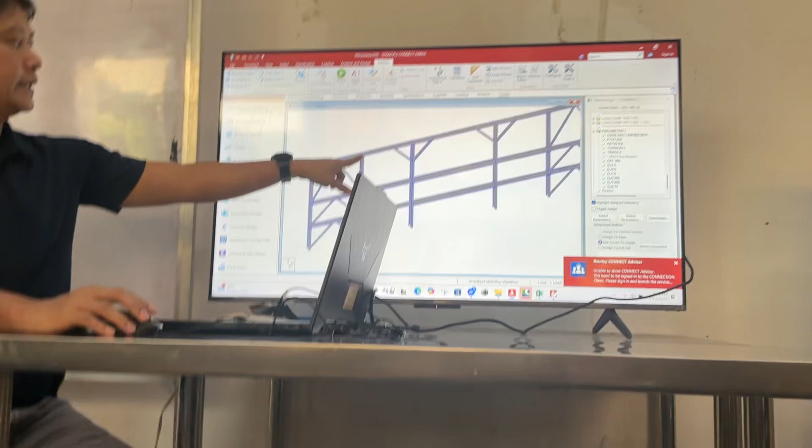This whole beam is being supported by this column. Either fixed supports or pin supports, basic setup. So this is one whole beam.

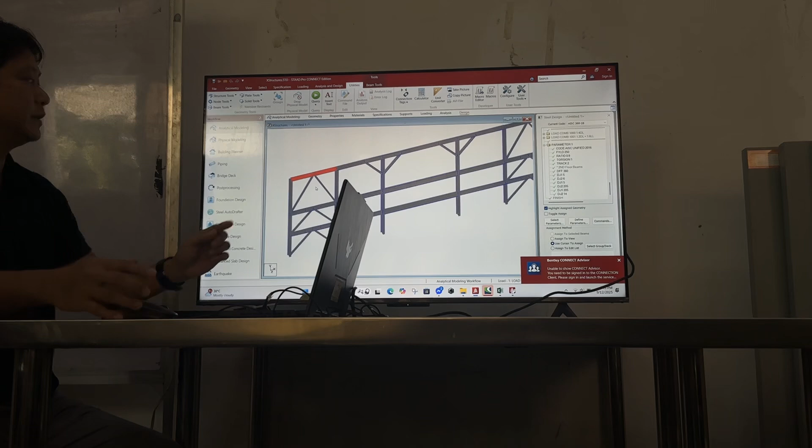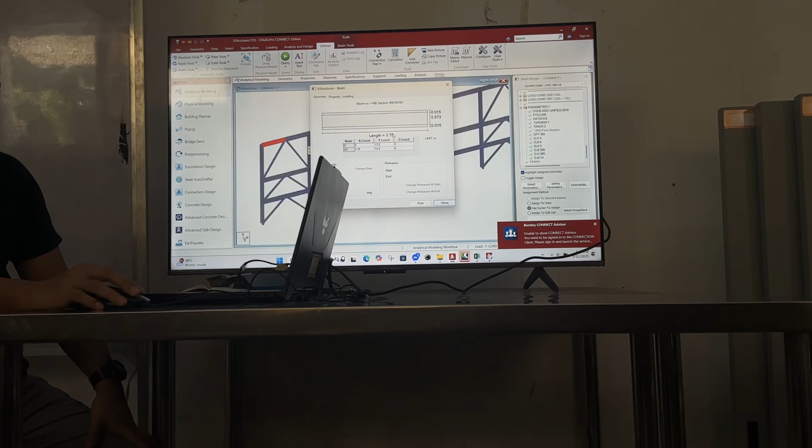The wind load is acting at the center, at the point where we're discussing. In this case, since it's a point load, it's in the middle. So the projected area of this beam is the depth of this beam. If you look at its depth, you can double click to get the area. 3.75 meters times, you add, you will come up with this number, 0.61 meter. That's your area, times its pressure. So you get a point load in kilonewtons.

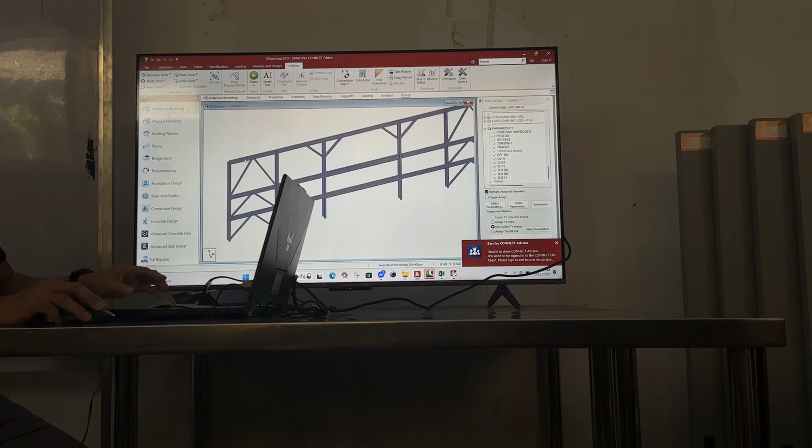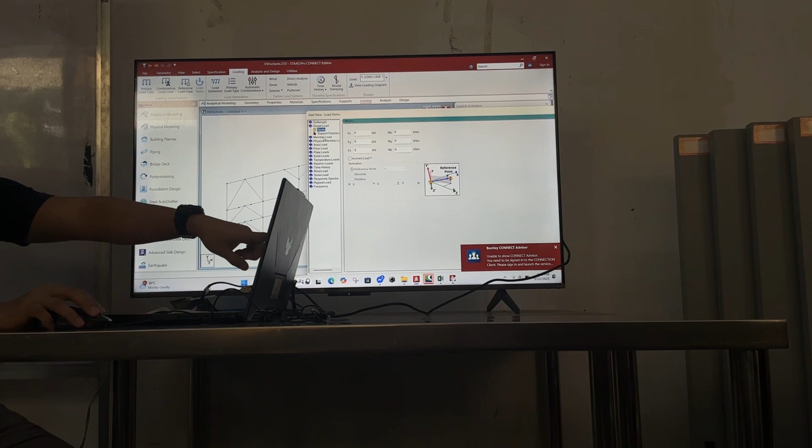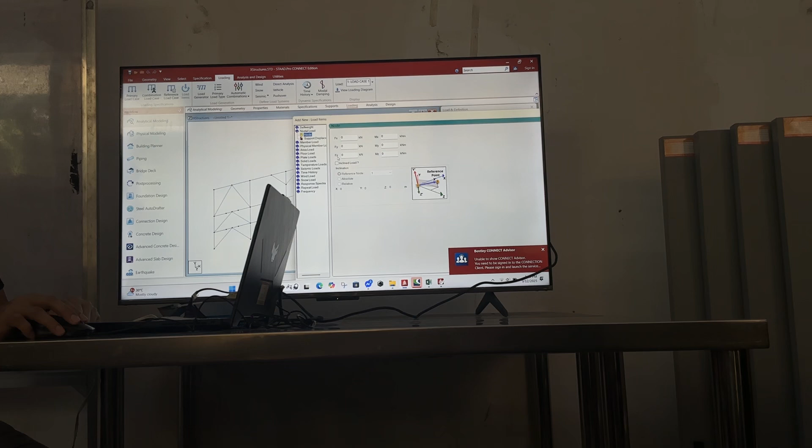Using this information and looking at the global axis, this is directed towards negative Z. So you go here, this is the unit, concentrated force, negative Z, so negative value.

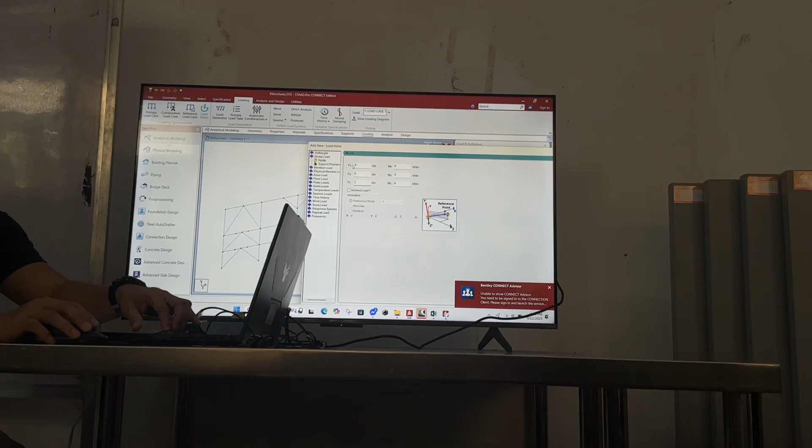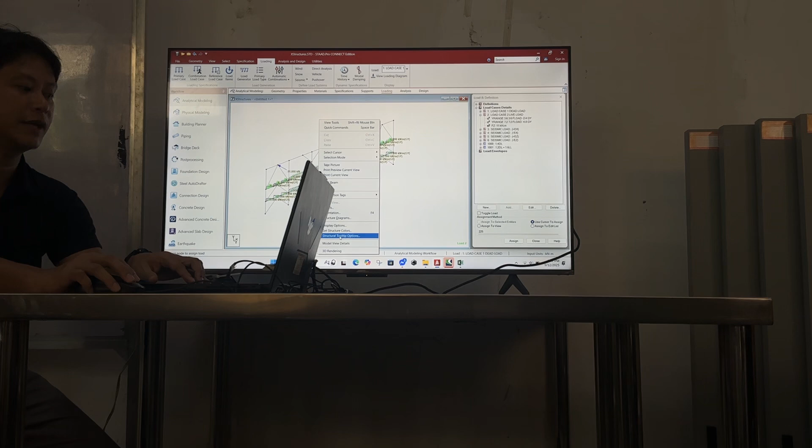What if about a load being applied to this brace, or to this member?

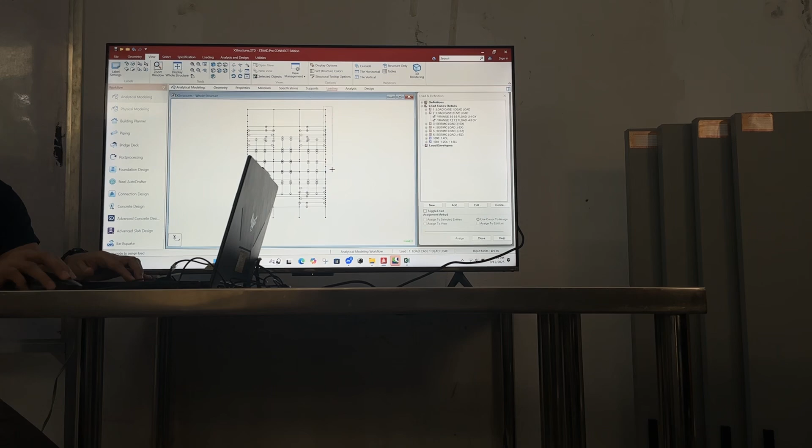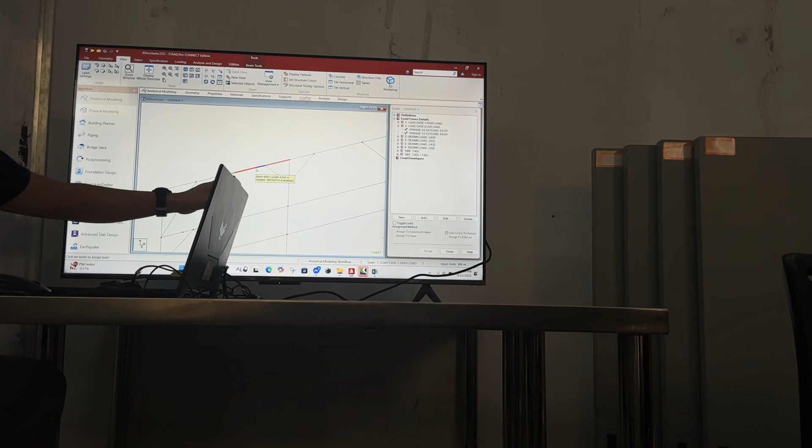So this one is 4.5 and this one is 3, they're not equal, right? So at the midpoint, that's where you place the force. Since the start of the beam is to the right, the 3.75 from this point, going to the right, will lie somewhere on this member.

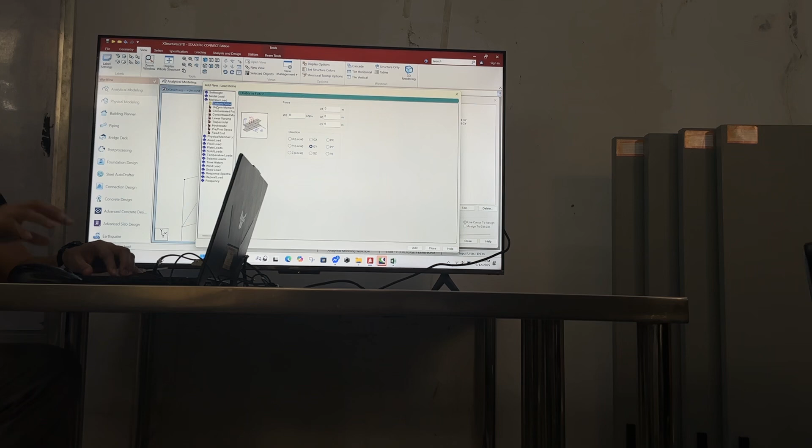Now for the wind load, you add the load, go to member load, concentrated force. Pick concentrated force, like this.

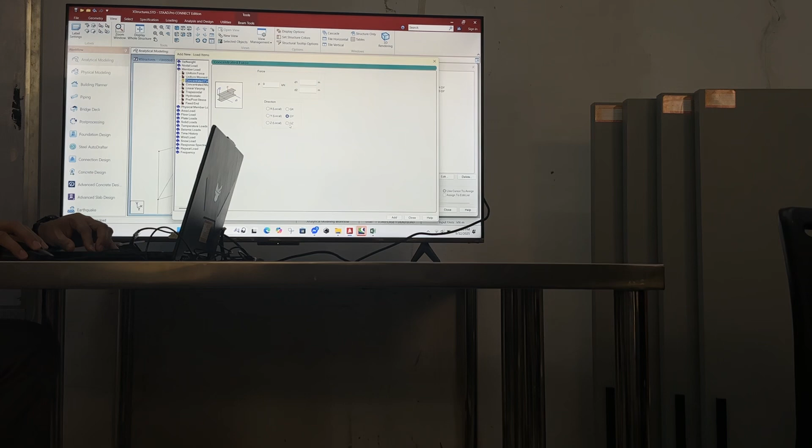Looking at the global axis, that is Z, along Z. So pick what you're using: Global Z. There's also Local, right? Global Z. Now the force is going to the negative direction, so you use negative. Negative 11.

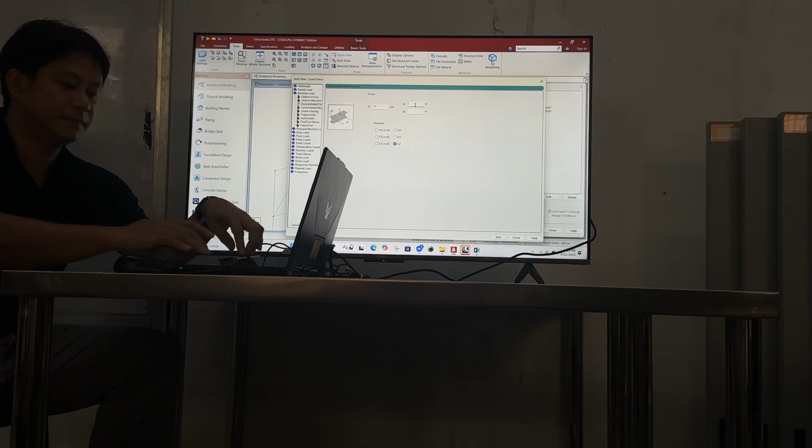Then your D1 is your distance along the beam, so that's 3.75, right? That one is from the center of the beam to the end of the wide flange, so it's 0. You can input 0, or you don't have to, the default stays the same. You can input 0 directly.

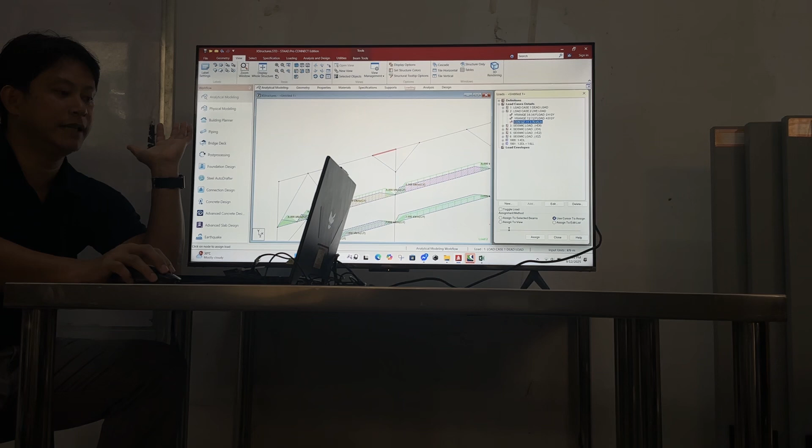Add, close, like that. Question mark, meaning it's not yet assigned. So you need to assign it. Click on that one.

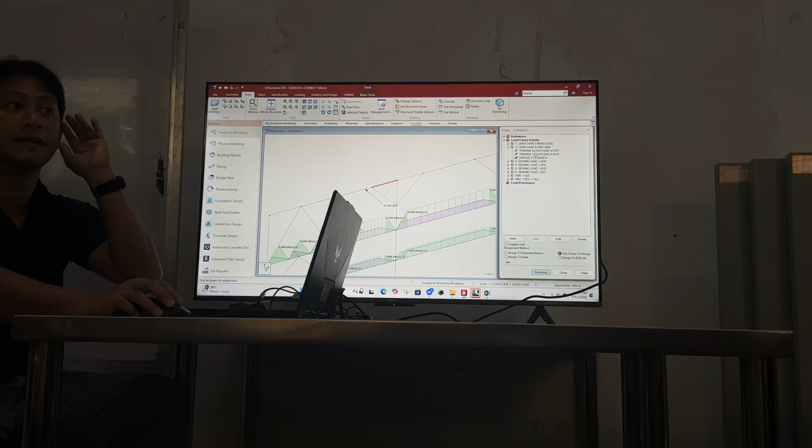So if you look at the syntax, on GZ, negative 11 force, located at 3.75 of the beam. Yes. So if you input it too, here, you can use this directly. Go to the editor, look for the code GZ, negative value, then center of this beam.